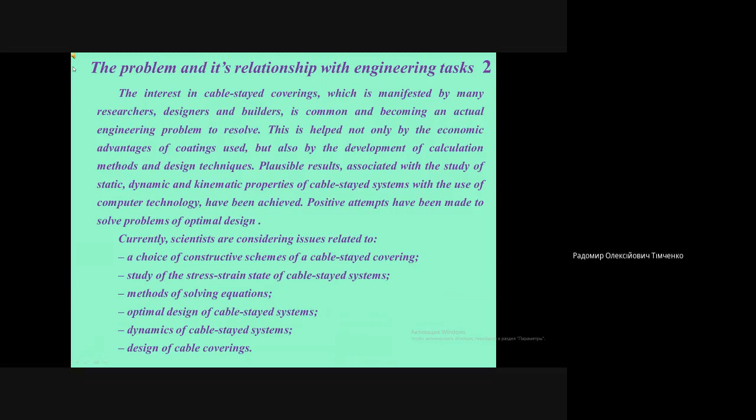Currently, scientists are considering issues related to a choice of constructive schemes of a cable-stayed covering, study of the stress-strain state of cable-stayed systems, methods of solving equations, optimal design of cable-stayed systems, dynamics of cable-stayed systems, and design of cable coverings. The relevance of the study is determined by the use of a constructive scheme of coverage, which allows the use of a lightweight roof structure using modern composite materials.

The outstanding works of local and foreign scientists in this field over the past 30 to 40 years are to be commended and encouraging for future research.

As a result, buildings and structures using cable-stayed systems are quite widespread: coverage of public and industrial long-span buildings, cable-stayed bridges, and overpasses.

But there are also problems that hinder the spread of cable-stayed systems in construction. This is, first of all, the lack of regulatory framework for the design and calculation of cable-stayed systems. All parameters and recommendations for design and research can be found only in the works of scientists who are specialized in this field.

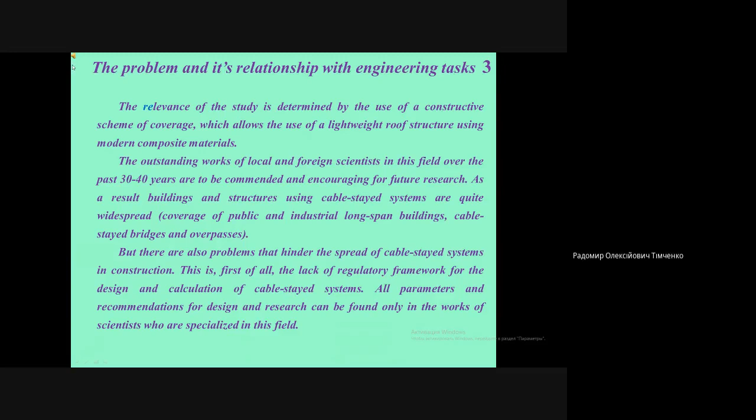Hanging cable-stayed structures are mainly used to cover large-span buildings and structures of various types, such as stadiums, gymnasiums, entertainment and trade buildings, where they are most cost-effective and aesthetically pleasing.

Buildings and structures with cable-stayed hanging coating, in contrast to dome and cylindrical coatings, allow covering an area of buildings and structures of much larger size without economic losses, while being easy to manufacture, install, and operate.

However, with increasing area of the cable-stayed cover, the support forces in the cable's flexible threads increase correspondingly, which are transmitted to the external support. In this case it is necessary to increase the stiffness parameters of the external support circuit. Local and foreign experience of building structures using suspension systems are described in the works of Kirsanov and Dmitrieva, Trushcheva, Faibyshenko, and Goreva.

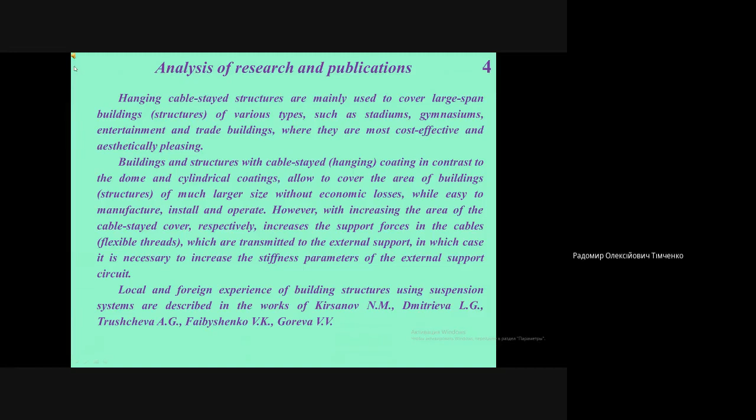The purpose of the study is to analyze the cable-stayed coverings used in long-span public buildings, finding their optimal parameters and choosing an efficient and economical type of roof.

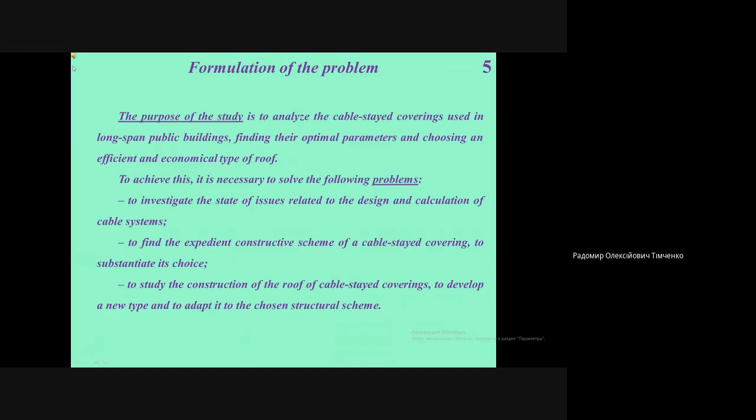To achieve this, it is necessary to solve the following problems: to investigate the state of issues related to the design and calculation of cable systems, to find the expedient constructive scheme of a cable-stayed covering and substantiate its choice, to study the construction of the roof of cable-stayed coverings, to develop a new type, and to adapt it to the chosen structural scheme. The following are examples of cable hanging coatings.

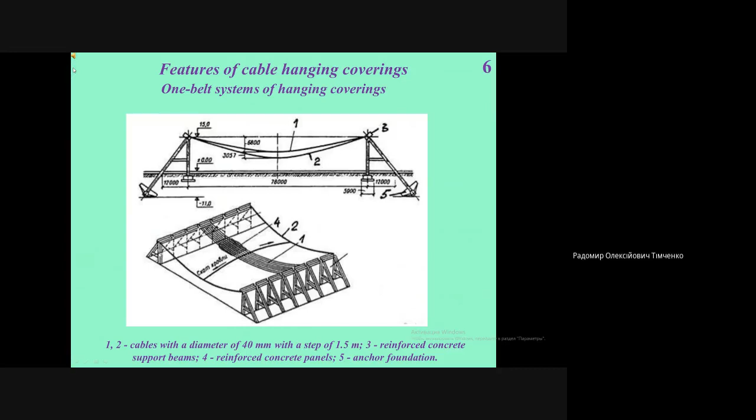Features of cable hanging covering, one-belt systems of hanging coverings: 1. Cables with a diameter of 40 millimeters with a step of 1.5 meters. 3. Reinforced concrete support beams. 4. Reinforced concrete panels. 5. Anchor foundation.

3. Reinforced concrete support beams. 4. Reinforced concrete panels. 5. Anchor foundation.

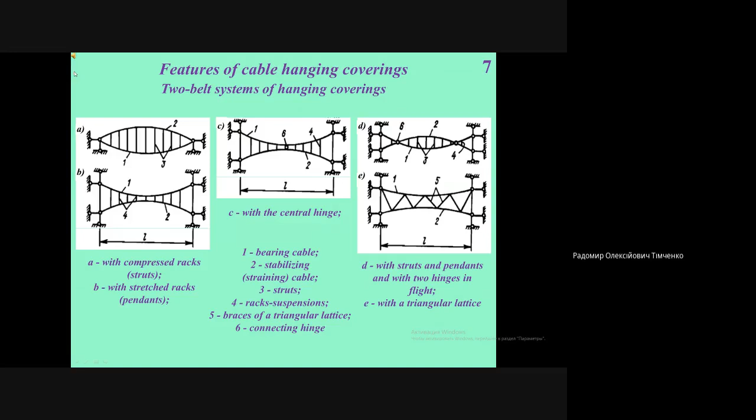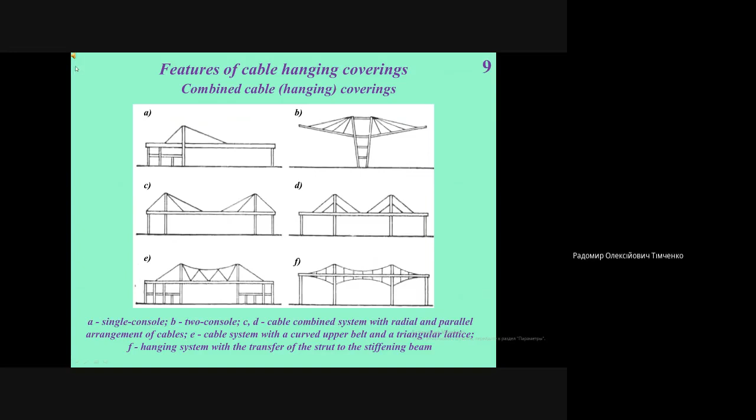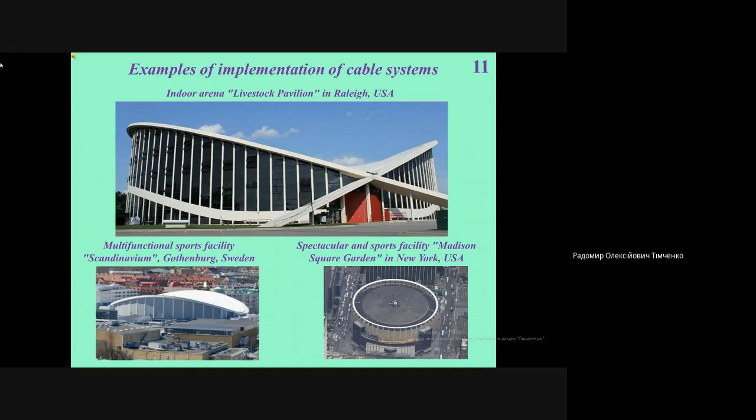The following are examples of cable hanging coatings: indoor arena livestock pavilion in Raleigh, USA; multifunctional sports facility, Scandinavium, Gothenburg, Sweden; spectacular and sports facility, Madison Square Garden, in New York, USA.

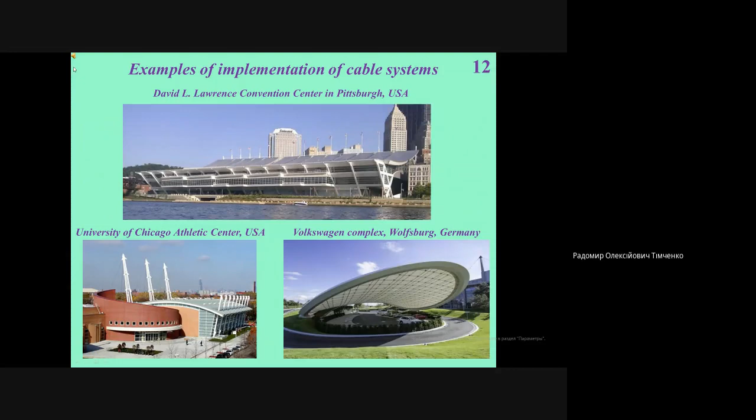David L. Lawrence Convention Center in Pittsburgh, USA. University of Chicago Athletic Center, USA. Volkswagen Complex, Wolfsburg, Germany. Cable tower cooling tower with central pylon, Germany.

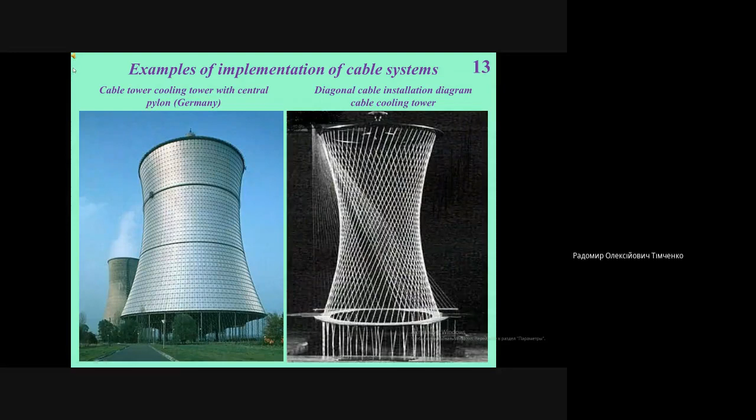Diagonal cable installation diagram, cable cooling tower. Stadium in Calgary, Canada. Wembley Stadium, London, UK. Spyros Luis Stadium, Athens, Greece.

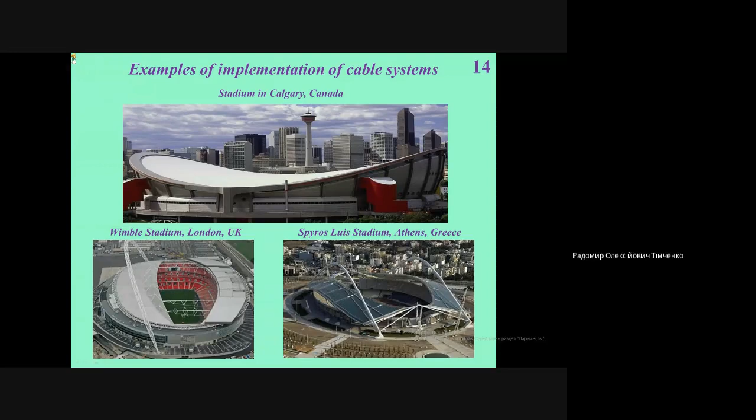The problem of designing a cable-stayed cover is considered on the example of a circus building.

It is designed on the basis of a typical circus project. The cable-stayed covering covers the auditorium of the circus, with a diameter of 48 meters.

The design of the cable-stayed cover took place in several stages. First stage: choice of constructive scheme. Second stage: choice of roof design. Third stage: calculation and selection of preliminary sections of cables.

Roof constructions in the form of a cable grid with an orthogonal cable network (option 1), and a network of cables formed by two groups of stabilizing cables (option 2), were considered.

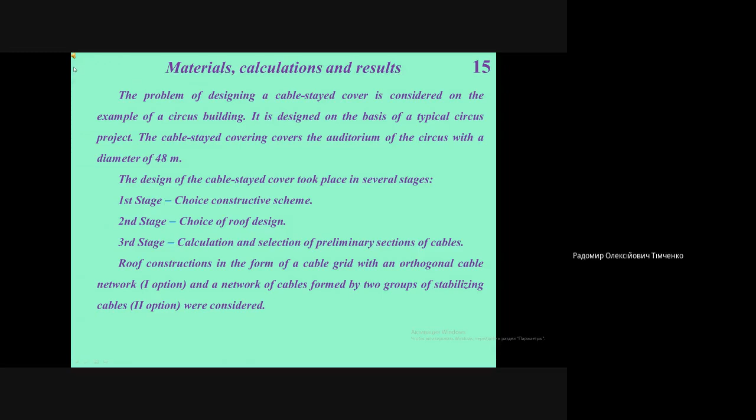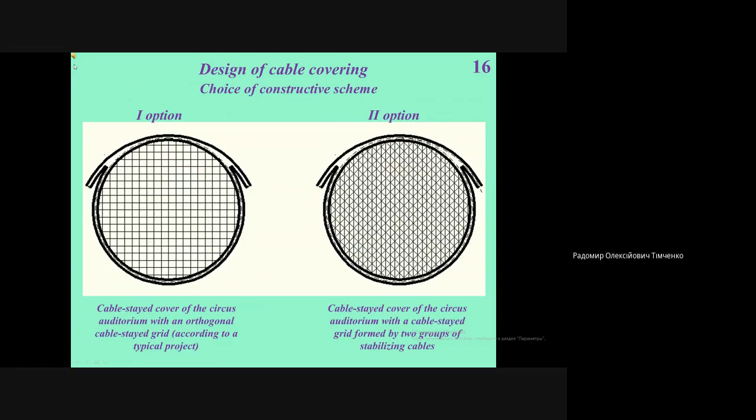Choice of constructive scheme. Option 1: cable-stayed cover of the circus auditorium with an orthogonal cable-stayed grid, according to a typical project. Option 2: cable-stayed cover of the circus auditorium with a cable-stayed grid formed by two groups of stabilizing cables. The maximum weight of lightweight types of roofs is normally limited to 40 to 60 kilograms per square meter.

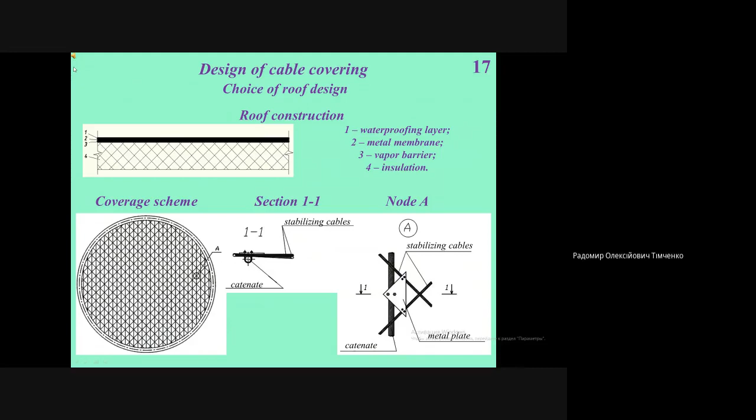A metal plate is used, to which the cables are fastened with a bolted connection. Fastening of cables at the node is compulsory. To fill the triangular cell, a triangular plate of insulation is used, reinforced externally with a composite material.

Reinforcement is performed as follows: two triangular plates of polyfoam are placed on top of each other, and a fiberglass membrane is laid between them, fixed at the edges of metal plates with a thickness of 3 millimeters, which are fastened together with a bolted connection. This structure is externally reinforced with rolled fiberglass.

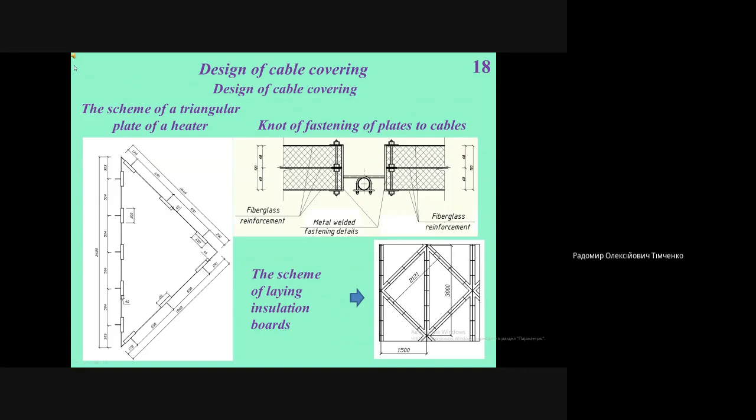Fastening of plates among themselves occurs by means of metal welded details of channel section. There are metal hooks which fasten the plate to the cables. The scheme of laying of plates of the heater is also presented.

In design practice, the magnitude of the prestressing system, the magnitude of the forces of interaction of the cables, is often set, provided that the stabilizing cables are almost excluded from operation at full load on the coating. In this case, the share of interaction forces in the total load on the carrier thread is small, and the determination of the forces in the grid, carried out by this method of calculation, is accurate enough to assign cross-sections of threads in advance.

The curves show the conditional volume of the cables for different values of the relative sagging arrows of the stabilizing and supporting cables, at different values of the coefficient QK. The graphs show that the most economical options are with QK equal to 1.3 and with larger values of the sagging arrows of the supporting cables.

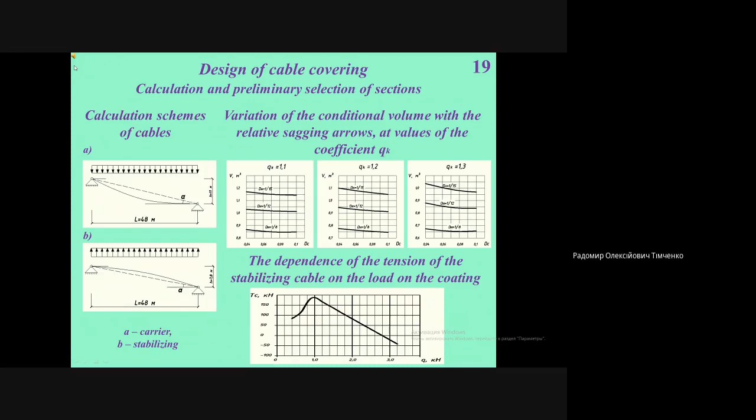Relative costs of concrete and steel, table of the result of the optimization problem, option 1 to option 2.

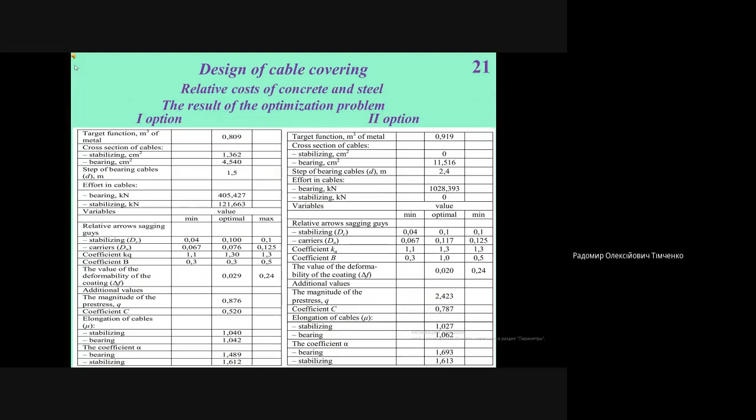Conclusions: 1. Cable-stayed structures are more economical compared to other types of roofs, but their widespread use today is complicated by the lack of design and calculation standards, as well as design solutions dated 30 to 40 years ago.

2. The constructive scheme of a cable-stayed covering formed by two groups of stabilizing cables is presented, and it is shown that an elementary triangular cell is formed, which allows the use of fragile roofing materials.

3. A new type of building plate is proposed, consisting of triangular plates of fiberglass reinforced insulation. This makes it possible to facilitate the design of the building without reducing the strength characteristics.

4. An optimization problem was solved to design the cable-stayed cover and determine its characteristics. As a result, the optimal cross-sections of the cables were obtained. For comparison, the optimization problem for a typical building variant was also solved.

5. The calculation shows the inexpediency of using a heavy roof structure for saddle-shaped cable-stayed coverings, due to the exclusion of stabilizing cables from work when the roof weight is large.

6. The developed design of a cable covering is more economical in comparison with the typical design of a roof, with reduced materials and more effective performance of the elements.